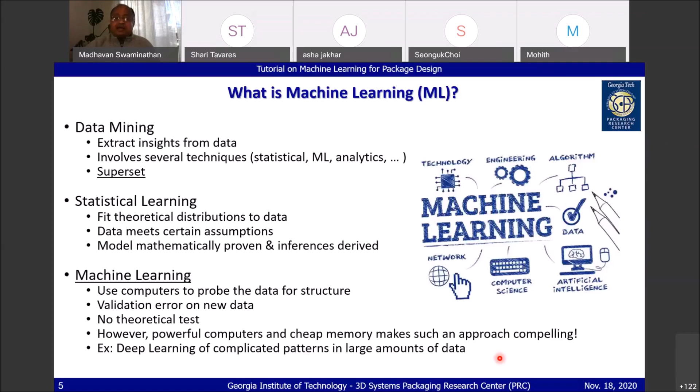So let me put this in the context of packaging, specifically design. I call this the model-based design paradigm. Typically when we do design, whether it's packaging or the general area of semiconductors, you have a design space and a set of design goals. You rely on ways to generate data in this design space so you can look at various variations of the design to make sure it meets the goals you're interested in.

Oftentimes we rely on simulators. These simulators could be SPICE, some kind of TCAD, design for manufacturing simulators, electromagnetic simulators, physics-based - it really doesn't matter. You rely on these simulators to generate data. Oftentimes when you generate this data and try to do these designs, it tends to be a very slow process. So the whole idea is to somehow speed this up.

And that is where you try to replace these slow methods for model generation through fast models. The idea here is if you can create a machine learning environment that replaces the typical way we do things, then you rely on these models that you've generated using this machine learning environment to do all of your design as well as your optimization.

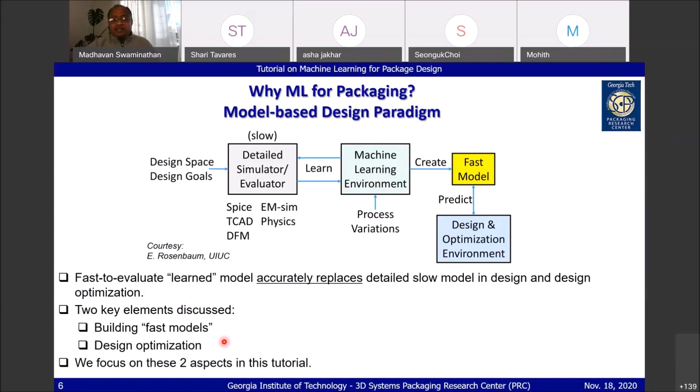So let's start with the fundamentals of machine learning. Let's say you're working with a one-dimensional problem - you have one input and one output, and they are somehow related to each other through a function f that is unknown. So what you try to do is gather data, as shown here. For every input x1 to xn, you have a certain output y1 to yn.

You group this data and call it the training data - these are the samples you have generated. You use this training data to go through this machine learning environment to come up with a learned model. This basically means creating a relationship between the input x and the output y - that's what we call the mapping. But the mapping you create is through some kind of function h, which is not the same as the function f. As a result, you will always have some level of error because these two functions do not match, but the idea is to reduce that error as much as possible.

Once you have done that, you rely on the function h such that for any arbitrary input, x1 to xn prime, you're able to get the output y1 prime to yn prime. Notice that this is new data - it's not the same as what you used for training. So if you look at machine learning, there's one part that relies on training and another part that relies on prediction.

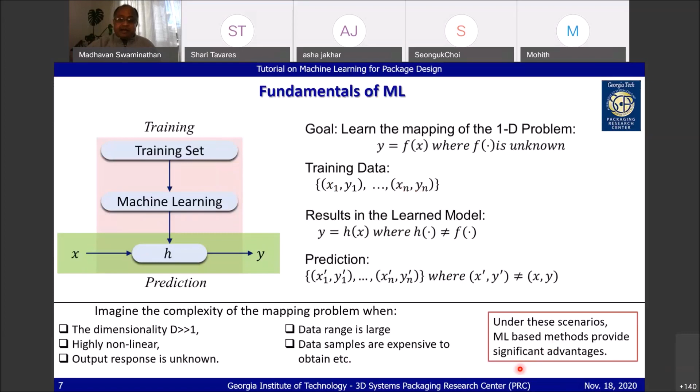So let's look at the limits and needs for packaging problems. In this tutorial, I'm going to break it up into two parts. The first part is trying to give you some flavor as to how to make use of these artificial neural networks.

I'll look at three that are important for packaging problems: a feed-forward neural network, a recurrent neural network, and a convolutional neural network. The second part is on Bayesian learning, where the benefits are optimization, fast model generation, and so on. I'll try to take you through three aspects of this learning solution. For all of these, I'll pose some problems and show how you can solve these kinds of problems that tend to be quite complicated.

Finally, very briefly, I'll touch on some future directions in the area of dimensionality reduction, extrapolation, and invertible neural networks. So let's dive deep into it.

So let us see how you would create a neural network. If you look at any neural network, the fundamental building block is a neuron, also called a perceptron. This perceptron has some inputs associated with it and an output. W represents the weights and X could be some input coming in, so you're weighting the inputs through these values W.

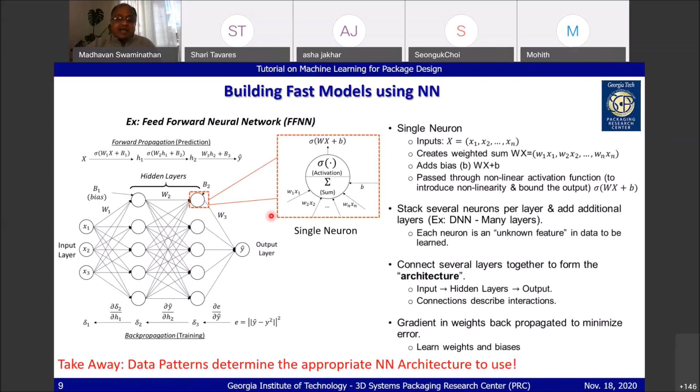Now, you have to somehow reduce the error, and that is where these back arrows come in. This is the way we control the error between what you're able to generate at the output and what the exact output needs to be. There are algorithms available that allow you to control the error by adjusting these weights. The key takeaway is ultimately the data patterns determine the neural network architecture we want to use, and in this example, the feed-forward neural network is an example of that architecture.

So how would you build a neural network? The first thing is you have to define the problem, in terms of what are the inputs and what are the outputs. The second part is domain expertise. This is extremely critical because you have to be an expert in the problem area to understand what kind of functional relationship you're trying to create, and also identify data structures.

For example, how important is the memory? I'll address this later on, along with spatial correlations and things like that. And then you go through this neural network design process.

You determine what kind of a neural network you want to make use of based on information you have about the problem you're trying to solve. Then you design your neural network architecture, which determines how many layers you need, how many neurons you need, and things like that. Then you have to generate data.

There are various methods available to generate data. We call these sampling strategies. One example is called Latin hypercube sampling. It's used quite a bit in the machine learning community. I've provided a Wikipedia link over here. It's just a way by which you can create your samples.

And then you use this to train the neural network by defining some kind of a loss function. We call this an error function. Once you've been able to minimize the error, you've created a model that you can make use of to make your predictions.

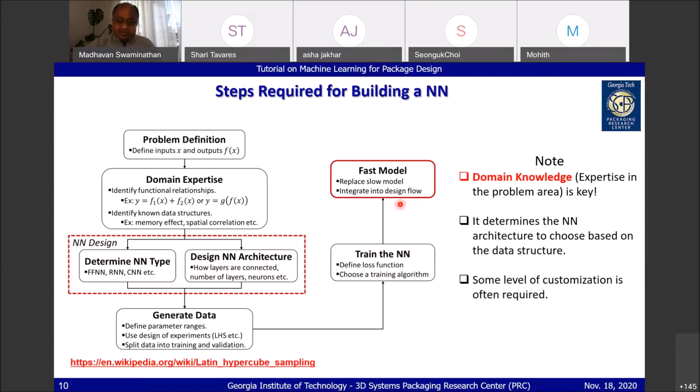So let me start with problem number one. This is an example of an antenna. Once again, the problem itself is not important. I want you to really appreciate why these neural network approaches are very useful.

Let's say I have some kind of a material here, and these blue circles represent metal particles, like nickel or cobalt, and I'm somehow coating it. That's the white region shown over here, called an oxide. And then I'm putting it in some kind of a polymer, so I'm creating a nanocomposite material.

Now, based on how you do the mixing and what material you choose, there's a set of complex equations that determines what kind of permeability and permittivity you're going to get from it. That essentially tells you how this permeability and permittivity would behave as a function of frequency.

Then I make use of this information to, let's say, design an antenna. This is an example of a planar antenna. I optimize this design so that I'm able to reach my objectives, such as gain, radiation efficiency, bandwidth, resonant frequency, and so on. So this is the process that you need to go through.

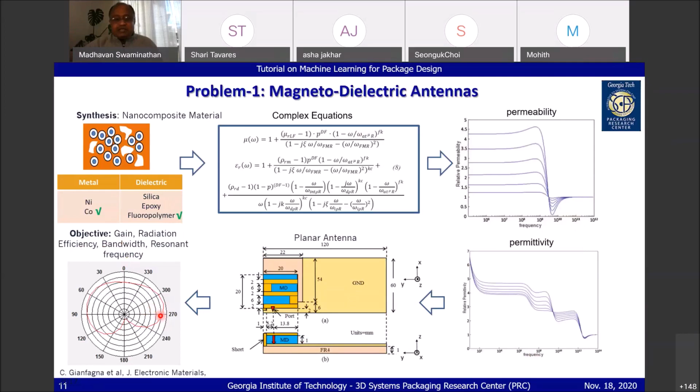Now, what we can do is basically hide all of those intermediate steps through a neural network, so that somebody who's developing these nanocomposite materials can determine what kind of properties they need to get the kinds of objectives that an antenna engineer would like. This becomes a very powerful technique because you can now go all the way from the materials aspects of the problem to an end solution. That is what is indicated over here.

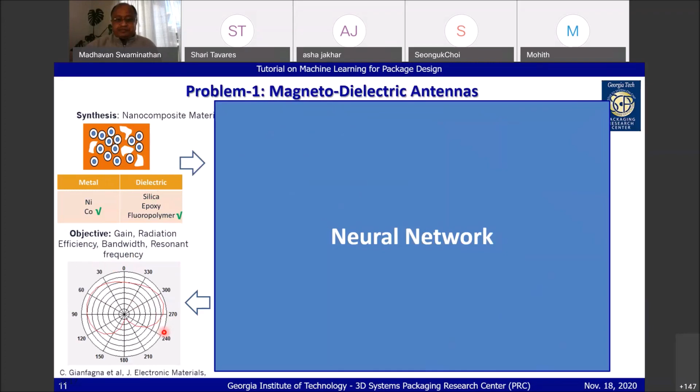So there are two parameters that have been made use of here: one is the radius of the particle, and the second is what we call the volume fraction. They become the inputs. You build this fully connected neural network, and then you create your output. If you look at the output, you have gain, radiation efficiency, bandwidth, and resonant frequency shown along the vertical axis, and what is expected is shown on the horizontal axis, indicating that you're able to make very good predictions.

Now, the benefit of creating a model like this is that you can use it to do all kinds of what-if analysis—it takes next to no time. That's why trying to create this fast model, or what we call a surrogate model, becomes very useful, because all of the information associated with that relationship is essentially buried in this kind of a model.

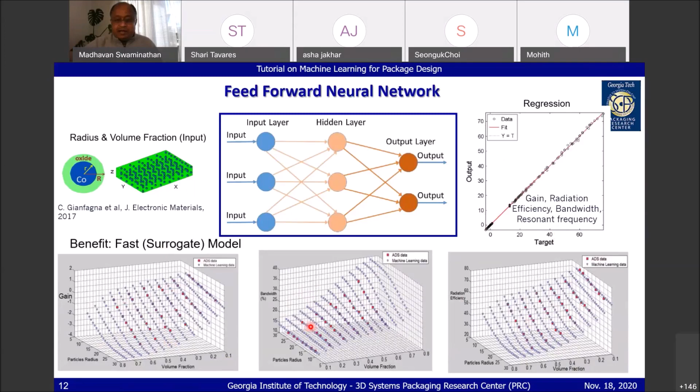So let's take another example. This is an example of a voltage controlled oscillator. Here the output voltage is a function of some frequency integrated over time, where this frequency is, let's say, another function of a control voltage. So you see the output voltage is related to one function here and a second function here.

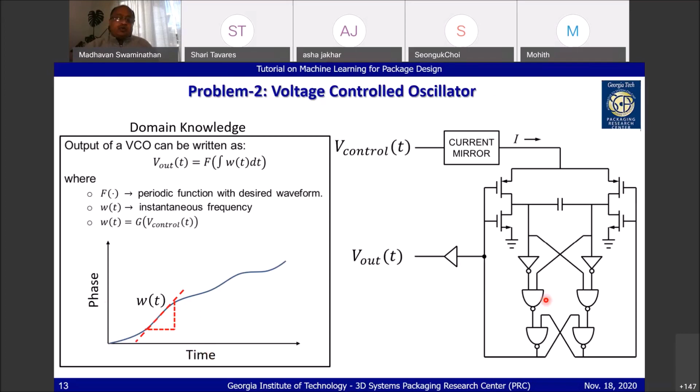Where this frequency is basically the gradient of phase versus time. So I have a circuit that I'm showing over here with these control voltages as well as the output. I can now create a neural network where this function G I can generate using this feed-forward neural network, what we call a fully connected neural network.

And the function F, I create another neural network for it. Then I have my inputs, I have my output, and then I compare it with what I would expect, to be able to do my error control. I can do the training using several algorithms that are readily available.

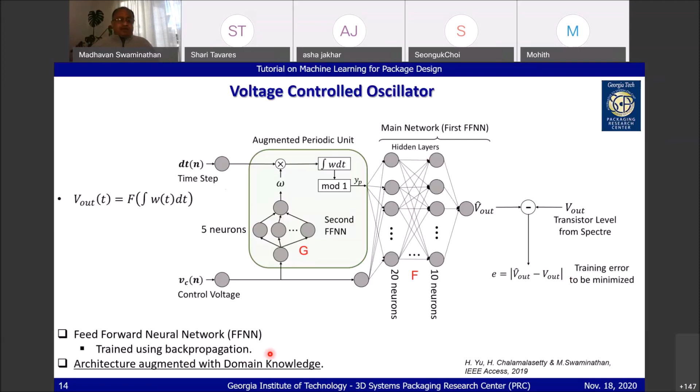This is an example where you can make use of a technique called backpropagation. Now, if you make use of this fast model, you'll see that you can generate the results shown here as a behavioral model that sort of mimics exactly what a transistor level circuit model would do.

So the blue represents the control voltage. And if you look at this waveform, the width of the pulse is continuously changing, indicating that the frequency is changing. Therefore, you can rely on this fast model to create all of these waveforms. The net result is that you save around 93% in terms of CPU time, because this becomes a fast model.

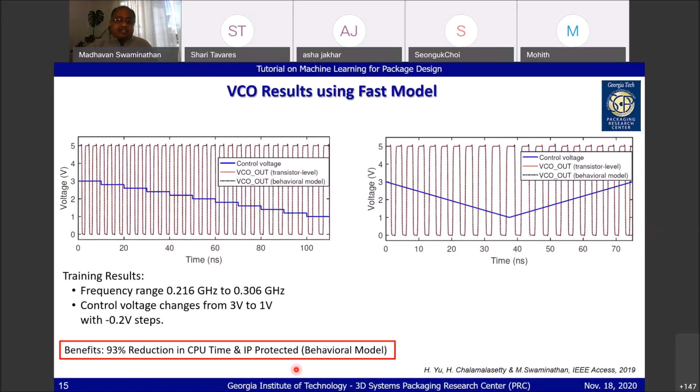Another nice advantage is that you are protecting the IP, in the sense that you are not sharing the circuit itself with others. Now, the question to ask is, what are we missing with these feed-forward neural networks?

If you're working with time series, basically time data, then there is this temporal dynamic behavior that you need to capture, which you cannot capture with these feed-forward neural networks. In general, when you have a high level of nonlinearity in circuits that have internal states or memory associated with it, it becomes very hard to capture that. Therefore, you need to somehow replace these feed-forward neural networks with another type of neural network.

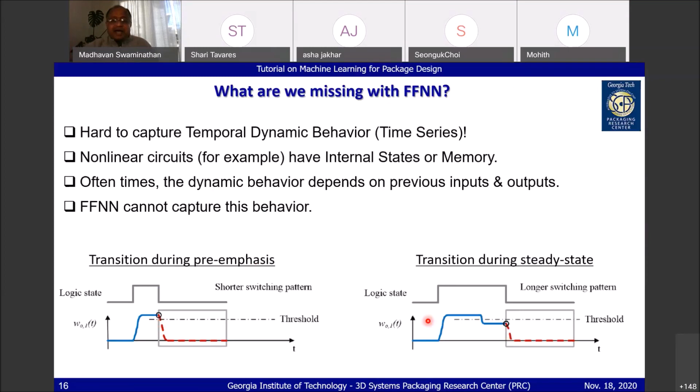So here's an example of two kinds of waveforms shown over here. The key message is that the manner in which the switching occurs depends on what happens at the previous time instance. This is where a recurrent neural network becomes very important.

What you do in a recurrent neural network is, let's say you want to create a mapping between the input and the output. You do that, but you also introduce this hidden state, where this hidden state depends on previous states shown over here. So you can create a neural network using not just the input and output, but also these hidden states that become part of your neural network.

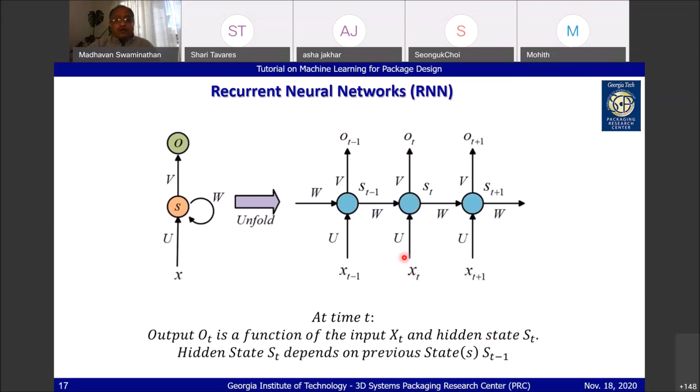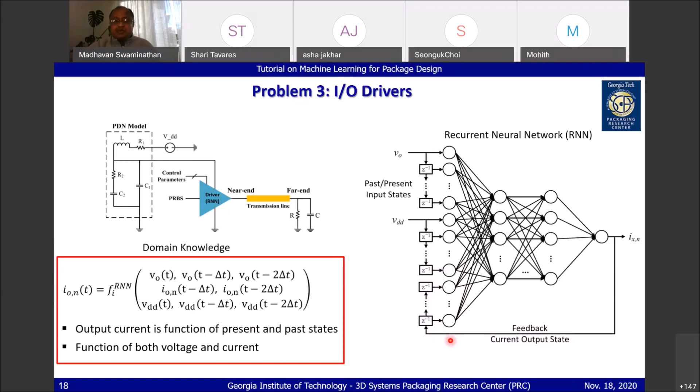So you go through a learning process, and in this example, you're learning the relationship between the current and the voltage, which is what's indicated here. So you have a bunch of voltages and currents, and you see this high level of non-linearity. You show this, you have spiking and things like that. That's what we call the dynamic behavior.

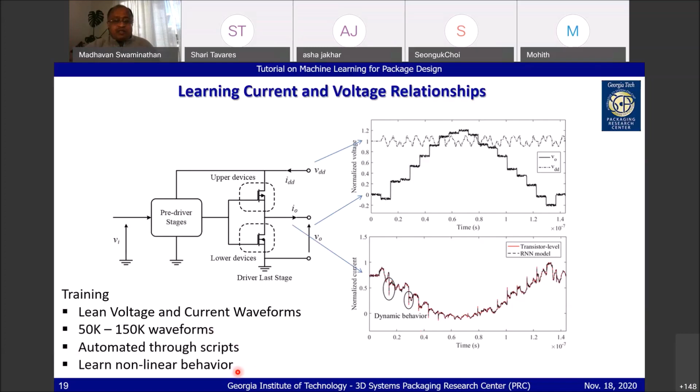So you capture all of that using a bunch of waveforms. In this example, you use anywhere between 50,000 to 150,000 waveforms. You can automate the whole process, and the whole idea is to learn this nonlinear behavior.

Once you have done that, you can now generate whatever output response you want, and you can also parameterize this whole model. As an example, you can say that this transmission line should have a line width over a certain range, and all that information is captured in this machine learned model so that you can start generating eye diagrams and things like that.

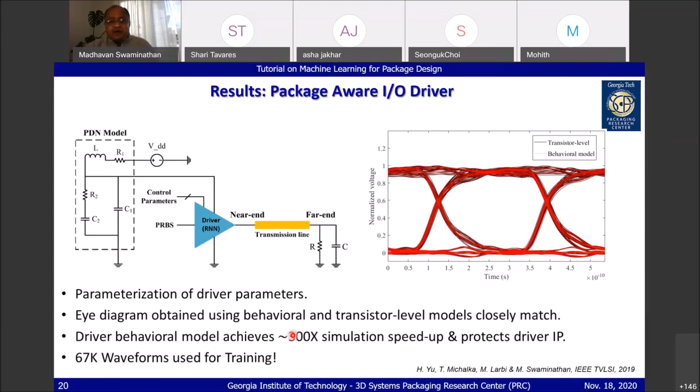In this example, we use something like 67,000 waveforms for training, but once you have trained it, generating these kinds of waveforms gives you a tremendous speedup. And once again, you protect your IP.

So next, let me get to frequency. Now, all of us understand the importance of frequency and a frequency response when we work with any kind of a package structure. What we want to do here is predict the frequency response of any kind of packaging structure. So how do you bring frequency into the neural network? One possibility is to bring frequency in as an input, and I can create a fully connected neural network over here.

The problem with this is it becomes very memory intensive. For example, if I have 500 design settings and each design setting has 2,000 frequency points, you multiply the two, and there are 1 million data points that I have to learn.

So another option is, why not include frequency at the output instead of at the input? Now when you do this, the dimensionality of the problem becomes very high at the output. The question is, how do you train that? And is this better since it is less memory intensive because you brought all the frequency points to the output?

As an example, those of you who work with scattering parameters or S parameters, if you're making use of 26 ports with 2,400 frequency points, you're looking at 1.7 million outputs. The question is, how would you go about doing this? I would like to focus on what is shown on the right-hand side today.

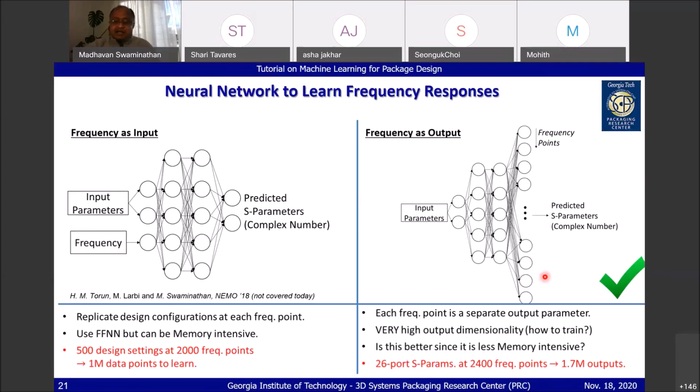That brings us to another very interesting neural network called convolutional neural networks. These convolutional neural networks are widely used in the computer vision community, and the idea is that you try to mimic human image perception. Now, what is the key takeaway with these convolutional neural networks?

If you look at these neural networks, for example in computer vision, one takeaway is that nearby pixels in images are highly correlated. So you only need to focus on part of an image at any time, and that's what is indicated here. You make use of a filter to look at only parts of the image, and then you stitch these various parts together at the output.

As you go from the right side to the left side, the connectivity of these neural networks or neurons becomes larger and larger, where you end up with a fully connected neural network over here and a very poorly connected neural network over here. That allows you benefits both from a computational standpoint as well as from a memory standpoint.

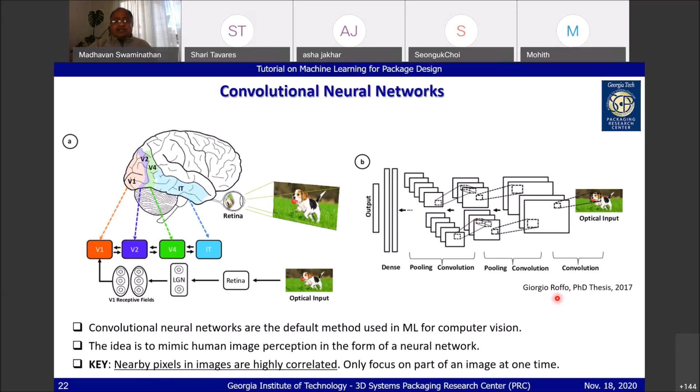So that brings us to the frequency problem. Let us say that we take these CNNs, or convolutional neural networks, and we transpose it. Instead of having a fully connected neural network at the output, why not make it fully connected at the input and loosely connected at the output?

The reason why you can do that is because if you look at a frequency response, the data points next to each other tend to be highly correlated with each other. And the word spectral comes because we are looking at a frequency response.

So if you look at this neural network, you have some input parameters, you create a fully connected neural network to be able to create what we call a latent space, defined here. All we do is create this latent space and unflatten it to get the frequency response for different kinds of design combinations.

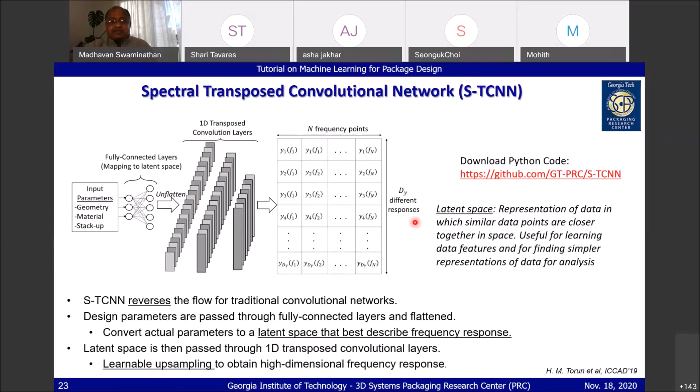And then we pass this through these convolutional layers, what we call 1D convolutional layers, that rely on the fact that frequency samples next to each other are highly correlated with each other. So we learned that, and then we are able to construct these different responses that are shown at the output.

So let's see how this works. Let's take another example. This is an example of a solenoidal inductor for integrated voltage regulators. So you're constructing an inductor here, a solenoidal inductor, with different parameters associated with it.

One of the issues with all these inductors is that they tend to resonate. And when you work with a neural network, for example a fully connected neural network, it is very hard to capture these resonances accurately. So you want to make use of something else, an example being this STCNN, or spectral transposed convolutional network. By doing that, notice that the response we are able to generate, the frequency response, is actually quite good, where all of the resonance behavior is captured very well.

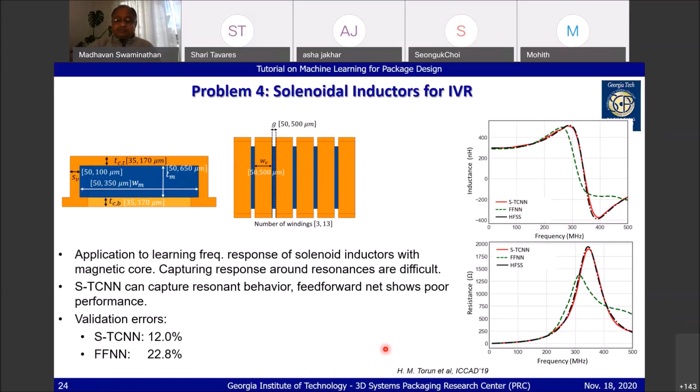Now, oftentimes when you create these neural networks with data, you want to create what we call physically consistent neural networks. This means that even though you have data, you want to make sure there are certain constraints you want to satisfy that are physics-based. An example I show here are two kinds of physics-based constraints you want to satisfy: what we call causality, and the second is passivity.

Don't worry too much about what they mean, except that there is a model that basically tells you, if you want to satisfy causality, how the real and imaginary parts of a complex number need to be related to each other, and passivity relates to the singular values of the data you're working with. So you can include these constraints into the convolutional neural network I described earlier.

This was what I showed you earlier. You can add two more layers that satisfy causality and passivity. But the key here is every time you satisfy this, you incur error in the data. One of the nice things when you create a neural network is this error control, so you can train it in such a way that not only do you satisfy these constraints, but you also minimize the error associated with satisfying them.

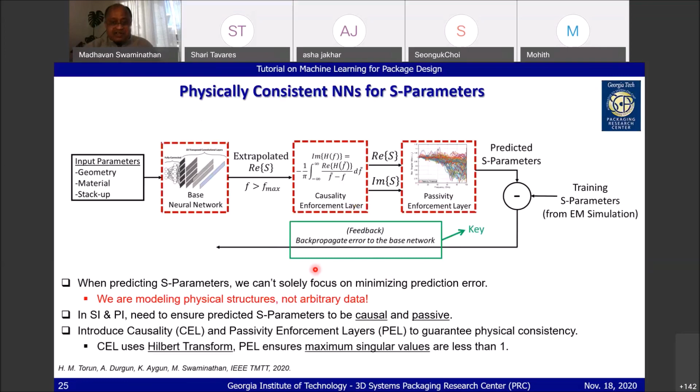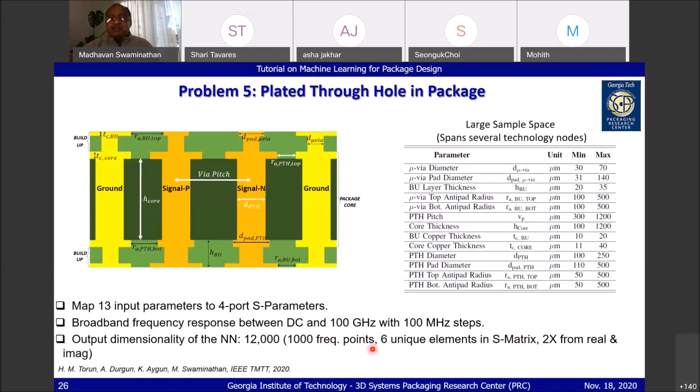Let's look at the results. You have lots of curves, and as you can see, we can generate data on the fly once you create this fast model. If you look at this spectrally transposed convolutional neural network curve and compare it with what the exact value needs to be, the error seems very, very small. However, if you take this frequency response and convert it into a time response, you see this part here - the blue curve - which basically means you're violating some physics-based constraints.

So you try to address that problem by adding these two extra layers that I showed you. If you look at the frequency response, they look very similar to what I showed you earlier with this STCNN. But the difference is that when you convert this into time information, notice that the response turns out to be very, very good, and does not violate any of the physics-based constraints or phenomena that are required. That same concept, in terms of how you make sure the data or model satisfies these physical constraints, is shown in these two graphs.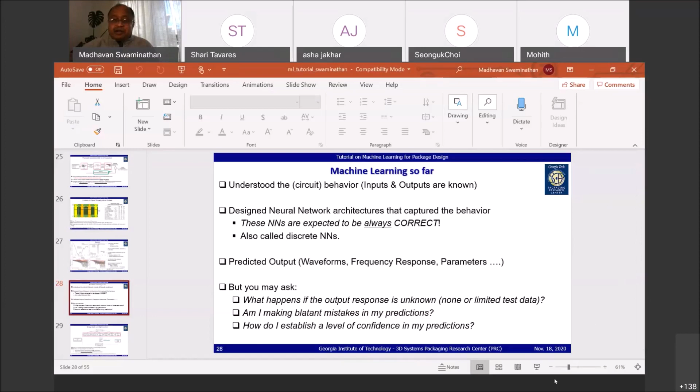Okay Shari, are you able to see my slides? Yes, they look good. So to answer some of the questions that I raised, let's go to the second part, which is on optimization. And I'm going to start with the design cycle here.

Once again, this kind of design cycle is not specific to just packaging. You can apply it on the semiconductor side and so on and so forth. Oftentimes, when you do design, you have a set of objectives and performance metrics. Based on this, you figure out some design topologies, you explore the design space, create an initial design, and then you spend time tuning these parameters, and you come up with some kind of an optimal design.

So the whole idea here is that if you look at this part, what is shown in the red box, right? There are lots of iterations that one needs to go through to make sure that the design you actually come up with indeed is the optimal design. And this is what we call human in the loop.

So the question to ask ourselves is: is there a possibility that we can completely eliminate the human in the loop by bringing in these machine learning techniques? So I'm going to focus on two elements to enable this. One is automated design optimization, and the second is what we call an uncertainty quantified model.

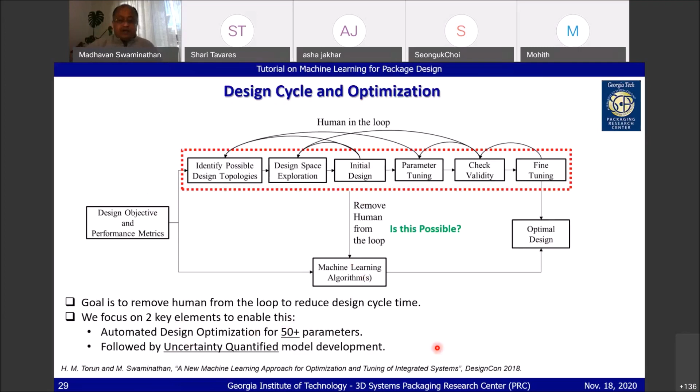So I'm going to start with a simple example, and once again I'm going to focus on optimization first. Let us say that I have an input and an output, and I've constructed a total of 6 data samples that relates the input to the output. I show you this graph and I ask you the question, where is the minimum given these data samples? And obviously the answer is, I don't know, right?

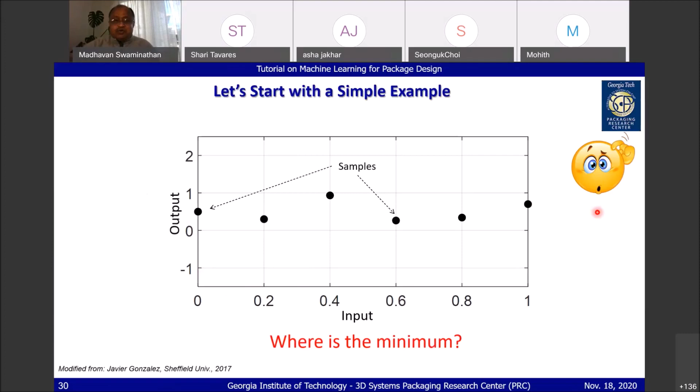So what we try to do is to fit a curve through these data points. Let's say I fit one curve through these data points, and based on this, I can figure out that the minima is right here. And that is what is shown over here. The y-axis is the number of occurrences of the minima, and the x-axis is the position where the minima actually occurs. So there is one occurrence of the minima for this curve that is shown here.

But the question you may ask is, how do you know that that is the right curve that fits these samples to each other? So I add more curves. Let's say I create 5 curves that connect these 6 samples to each other. Based on each one of these curves, I determine where the minima is. As you can see, some of them have single occurrences, some of them have double occurrences, right? The question you may ask is, how do you know that these 5 curves are sufficient?

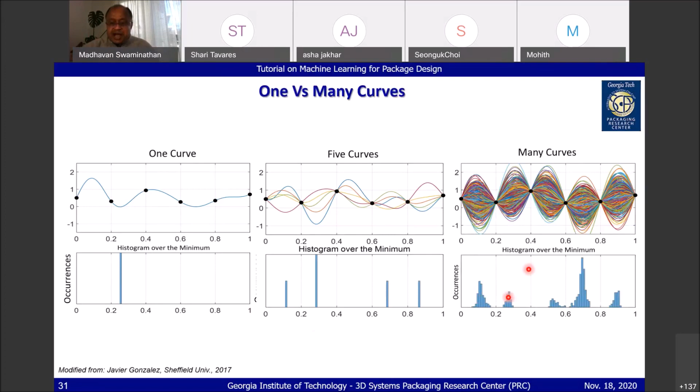So I add more curves. As you can see, as I add more and more curves, the frequency of occurrences of these minima changes, and the position of the minima changes as well. So that is what we try to make use of.

So let us say that we make use of infinite curves. I have the same 6 data samples that I've connected together, but then based on these infinite curves, I have a spread in this blue line that is shown over here, right? So if I look at this, I call this blue line my surrogate model, and I say there is a certain uncertainty around these surrogate models shown by the spread that is shown over here. And I call these confidence bounds.

Now the key thing to note over here is that I make the observation that these black samples shown over here come from a simulator that is very computationally expensive. So I want to keep these black samples to a minimum as much as possible, and instead rely on the surrogate model as a way to do my optimization.

Now if you look at the second curve at the bottom, the y-axis is your occurrences and the x-axis represents the position. So this is nothing but your probability distribution function. If you look at this, it now becomes a continuous curve, so it's no longer a histogram. Based on the number of occurrences that I have, I can determine where the minima is going to be, and that becomes my next sampling point.

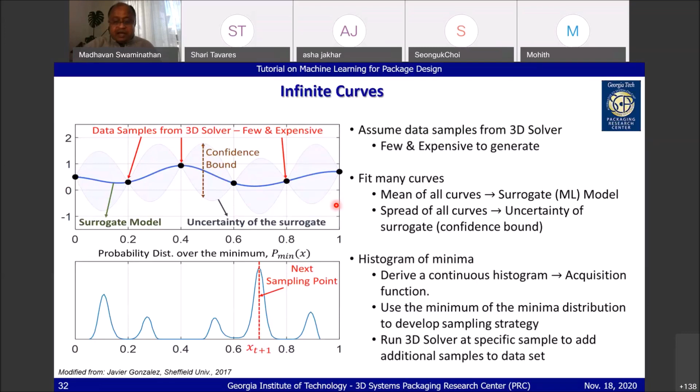So the next sampling point means that I'm going to make use of this expensive solver to add another sampling point so that I learn more about this function that connects all these samples to each other. And that is what is indicated over here.

So you have a surrogate model, and in general the surrogate model we make use of is called a Gaussian process. It's a very well-known process that has a certain mean and a covariance associated with it. This K over here, we call this a kernel, and the kernel is nothing but a covariance function. I'll explain to you shortly what this kernel actually represents.

If you look at this kernel, you'll come across some parameters you need to tune, and we call these the hyperparameters. Hyperparameters are adjustable parameters that must be tuned to obtain a model with optimal performance. If you look at this Gaussian process and try to plot it, this is what it's going to look like: there's a line that corresponds to the mean, and then there's a spread that gives you your confidence bounds and so on.

The second function that I showed you, which is the histogram that becomes a continuous curve, is what we call an acquisition function. We make use of this acquisition function to determine where the next sampling point needs to be. Once I've determined what the next sampling point is, I can make use of that to run my 3D solver to learn more about this system or function.

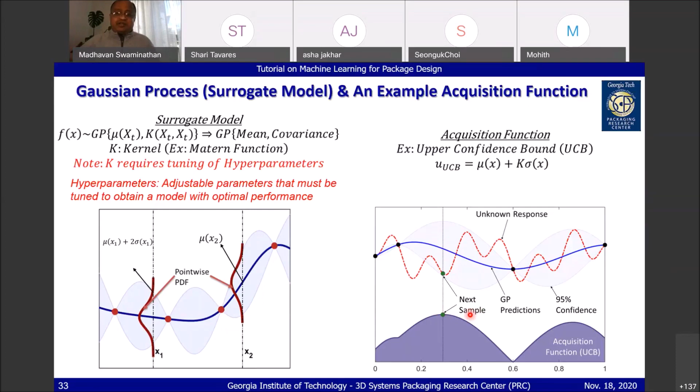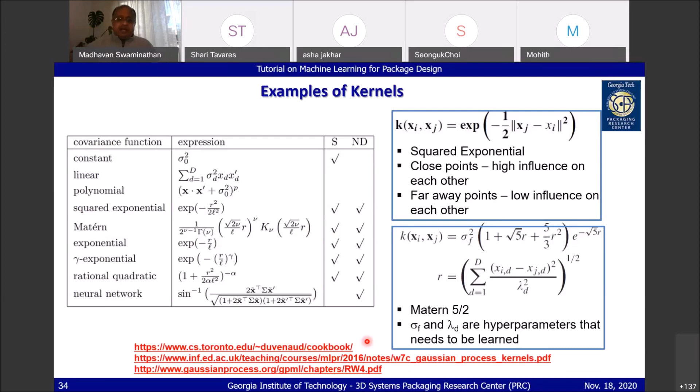So that brings us to this Bayesian active learning and optimization. So how does it work?

Let's say you're looking at a 1D function, so you have one input and one output, shown as a function of the input. Based on this, I do a function evaluation, and then I rely on this model, essentially my acquisition function, to determine what the next sample needs to be. This means I'm using the 3D solver very few times and relying on my acquisition function to figure out where the next sample needs to be.

We call this learning process active learning because I haven't pre-constructed a model. As I add additional samples, I'm continuously learning from it. This, I believe, is a must-have for packaging. It takes this original problem, which is very hard, where you're generating data from a 3D EM simulator, and transforms it into a series of much easier problems to solve using this acquisition function.

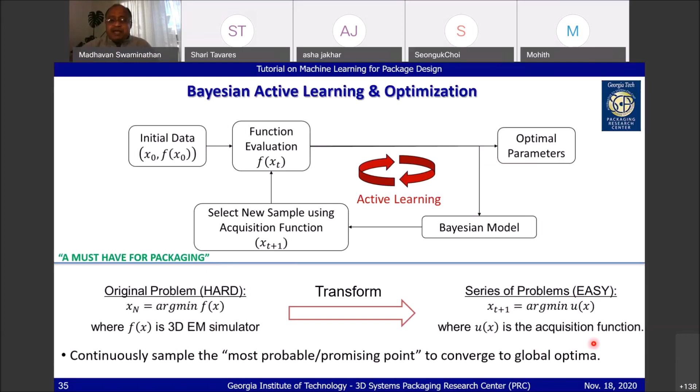So a few questions to ask yourself: how do you decide the next sampling point? You're relying on this acquisition function, which itself has several peaks and valleys. So how do you know you're actually choosing the next sampling point based on the minima associated with that acquisition function? Therefore, you have to do optimization.

The question to ask yourself is, if you're trying to optimize the acquisition function, and the acquisition function itself is highly non-convex, meaning it has lots of peaks and valleys, then optimizing that acquisition function can be very time consuming.

The second question is, how do you know which is the right acquisition function to choose? You just don't know, because it is problem dependent. So you need some kind of generalization capability.

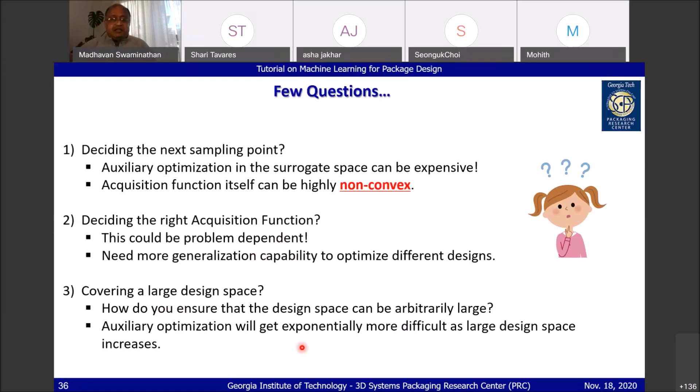The third is, if I'm trying to cover a large design space, how do you actually make that happen? Because how do you address a large design space while also reaching the global optimum at the same time? So let me put this in the context of another example or problem.

This is in the area of clock skew minimization for 3D ICs. Once again, the problem itself isn't important, because we're going to pose it as a black box problem. In this example, I have a bunch of chips sitting on top of each other, connected through TSVs. The center chip has a clock distribution network, and the top and bottom chips have logic circuits. As these circuits switch, they create heat that generates a temperature gradient along the center chip. That temperature gradient creates clock skew.

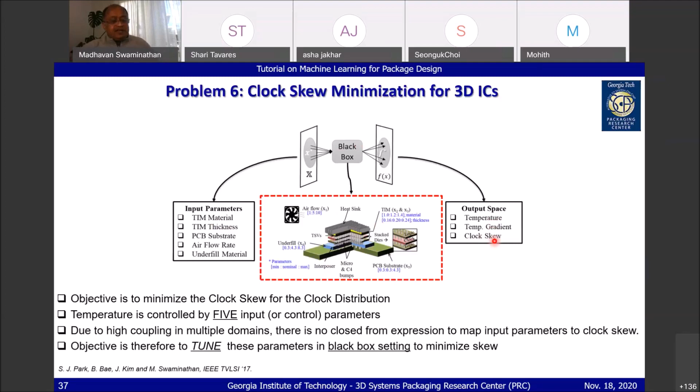Your goal is to minimize the clock skew by minimizing the temperature gradient, using a set of input parameters. So this problem is represented as a black box, where the input parameters you want to tune are shown here, and the output is the minimization of the clock skew. This is an example with 5 control parameters.

Let me take you through a technique called two-stage Bayesian optimization, and I'll show you how this works. You break up the problem into two parts. The first is fast exploration, meaning you're trying to learn more about the system, so you look at regions with large variance or uncertainty in the data and create sampling strategies around that. Then you do pure exploitation, meaning you try to converge to the actual result, so you look at closely spaced points.

Now, the method itself is broken up into three parts, shown here. I'm just going to focus on one of the issues associated with learning acquisition functions, which was one of the questions I raised earlier.

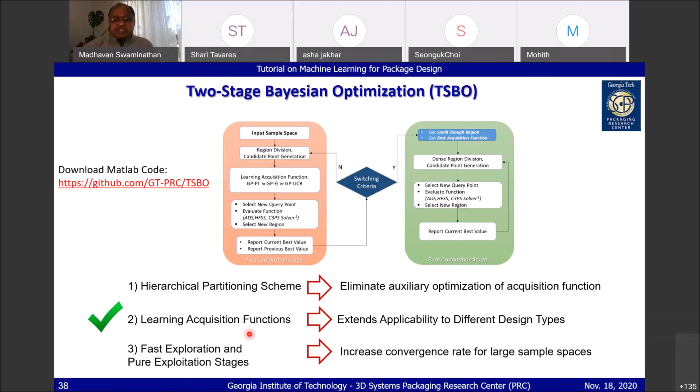So let me address learning acquisition functions. What you can do is, rather than working with a single acquisition function, work with a library of acquisition functions. The examples shown here are the upper confidence bound, which I showed earlier, and another acquisition function, expected improvement, or EI. So you have a library of acquisition functions.

As you go through the optimization process, you learn which acquisition function is appropriate depending on what stage of the solution you're looking at, and that's what's indicated here. So not only do you learn the behavior of the response or function, but you also learn the acquisition functions. There is a way by which this can be done.

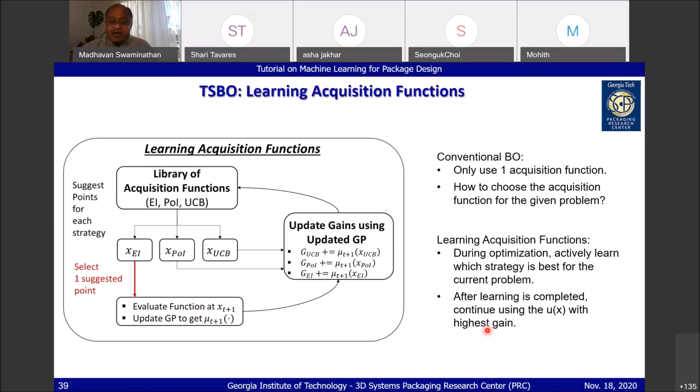So let us see how this works. If you look at this response surface here, it's a 2-dimensional problem. I have two inputs, x1 and x2, and let's say 1 output.

This triangle represents a sample that I've created using my EM solver, and this represents iteration number 1. That's my starting point, so I have 1 data point. Now I use a sampling strategy to create these circles, what we call candidate points.

Making use of these candidate points, I use the acquisition function to figure out where exactly the next sample needs to be. In this example, the next sample should be at x1 equal to -1 and x2 equal to -1. So I take this and run my 3D solver to generate another data sample, which would be a second triangle.

Notice that in this response surface, the global optima is right here, shown as the diamond. As I go through this process, let's say I go to iteration number 15, you see you're going to have a lot more triangles. That means I have run this 3D solver to learn more about the system. This is the exploration stage.

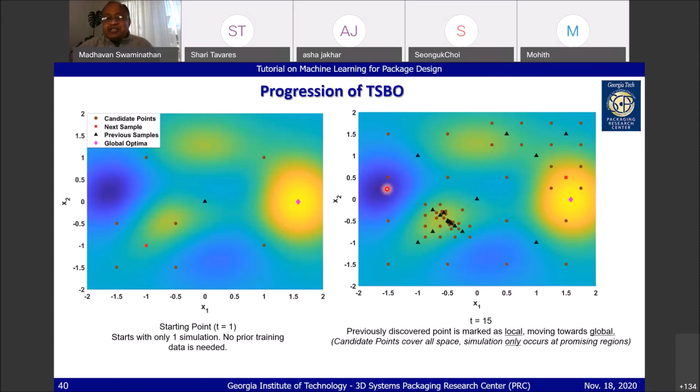Based on this, I also create these circles, which represent my candidate points based on my sampling strategy at iteration number 15. Based on this, I determine that the next sampling point needs to be over here, corresponding to x1 equal to 1.5 and x2 equal to 0.5. I run my 3D solver again.

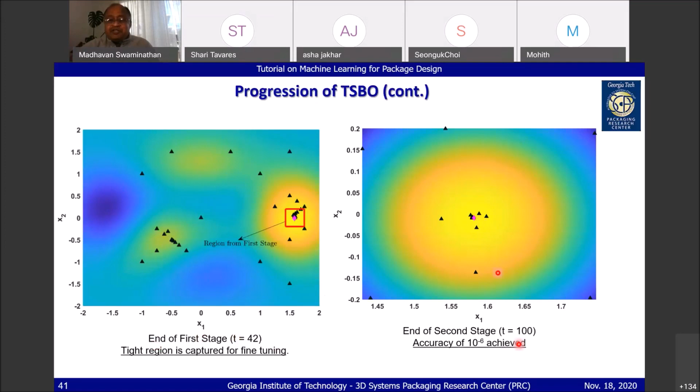Let us see how these results look like. I take the same example, and the blue curve here represents the convergence of this method that I just described. The x-axis represents the number of simulations you're making use of. The y-axis represents your clock skew.

The first part, the steep part over here, represents your exploration. Very quickly, you try to come to the region that has the global optimum. Then after that, you try to converge to the exact value. This part here depends on the kind of accuracy that you're looking for.

Now, we've also compared this with two other methods. One is what we call a nonlinear solver, shown as a green curve. And IMGPO is another machine learning based algorithm that has been used in the neuroengineering community. If you look at the convergence for both of these techniques, it's not as good as what I just described.

The takeaway is that oftentimes people say you can make use of a machine learning technique that's available, a toolbox, and blindly apply it to your problem. The answer is no, because if you do that, you'll only get so much benefit. You need to understand the data structures—that's where domain expertise comes in. Once you understand the data structures and the samples you have, you can come up with a much better solution compared to what's out there.

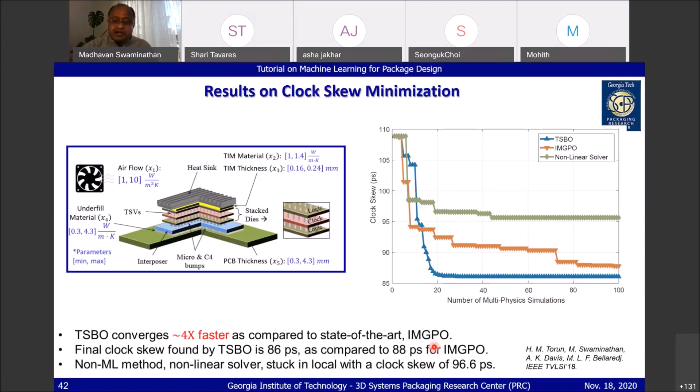So let us take this method that I just described and say what happens if I want to increase the dimensionality from 5 to something much higher. You will find that very quickly you start meeting two fundamental problems. The first one is what we call the statistical problem: how do you construct a high dimensional predictive model with scarce data, especially when parameters interact with each other?

This is where the kernel comes in, what we call the surrogate model. The surrogate model is only as good as the kind of model, or the kind of kernel, you're making use of to construct it. So if that model is not good to begin with, you'll always hit a wall in terms of how much additional information you can get from that surrogate model.

The second is algorithmic: how do you choose the next sampling point? Because if you do this auxiliary optimization that I mentioned earlier, it's not very practical. As you increase the number of parameters, say from 5 to 30, you have a very complex surface for the acquisition function, and doing optimization on that surface can take a lot of time as well.

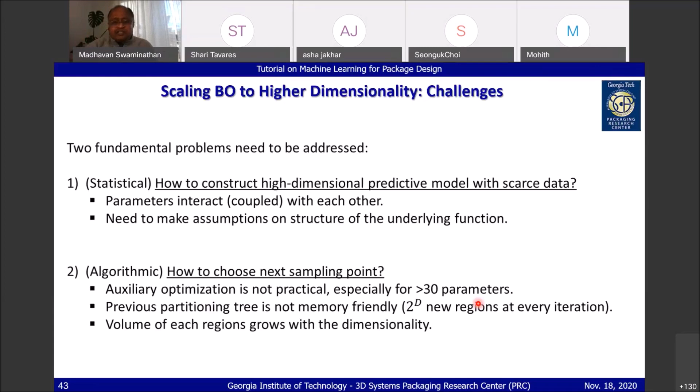Let me try to address both of these issues briefly. If you want to scale this optimization technique to higher dimensionality, you can change the kernel. You construct what we call an additive Gaussian process. The idea is to create different kernels that you can add to each other, and depending on the kernel you use, you capture the first order interactions, the second order interactions, or even the dth order interaction. This additive Gaussian process is a superset of the conventional Gaussian process I mentioned earlier.

The second issue is, how do you go around this whole auxiliary optimization problem on the acquisition function? The answer is you create some kind of tree structure where you rely on candidate points, and based on these candidate points, you develop a method that allows you to figure out which one of these candidate points you can use as your next sampling point. This method is available for you to download from the link shown here. So let us see how this works.

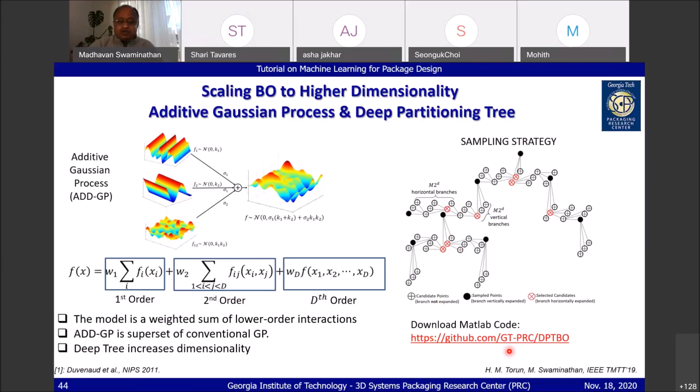I'm going to take the example of an RF wireless power transfer system. In this example, you have a very complex circuit, where some of the circuit elements are in the form of a layout and others are in the form of transistors. Since it's an RF wireless power transfer system, the input is RF power and the output is DC power. So your goal is to maximize the RF to DC harvesting efficiency, while at the same time minimizing the RX coil area, so you can build a miniaturized system.

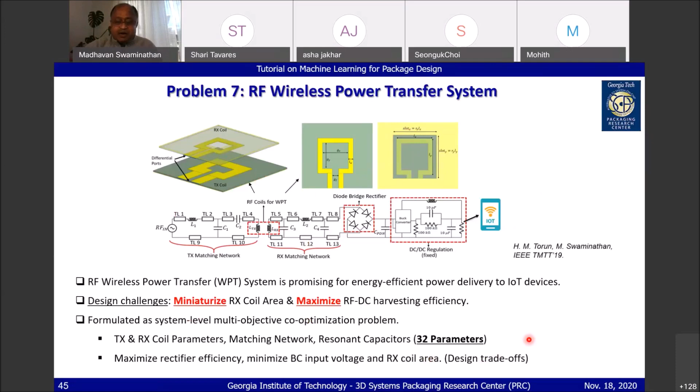This example has a total of 32 parameters. Remember, from 5, we have increased it to 32. Let us see how this works. The results are shown here. With this method, the additive Gaussian process along with the deep partitioning tree, the system efficiency you're able to reach is around 60% or so.

With a coil area of around 11 square millimeters. If you compare it with some of the evolutionary algorithms out there, for example particle swarm, you see the efficiency is lower, but the coil area is smaller as well. There is a way by which you can control or weight which of these parameters is more important to you. In this example, it was weighted so that the system efficiency had a higher weight compared to the RX coil area.

Now what you see in the center is a run-of-the-mill, readily available additive Gaussian process code. If you blindly make use of that, you see that even though the system efficiency comes close to what was shown, the RX coil area becomes very large. So the takeaway here is that you gain quite a bit if you're able to understand the problem and make changes to the neural network based on that information. If you look at these two boards, the first one was hand-tuned, took us around 6 months. The second one is this machine learning-based solution. You get an advantage not only in performance, but in size as well.

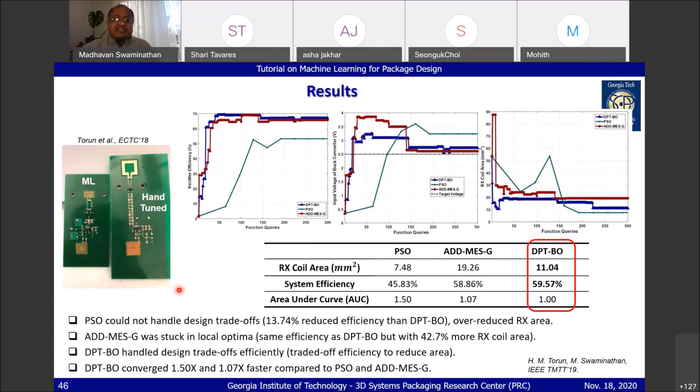So with that, let me move on to the last part of this presentation before I get into future directions. And this is in the area of creating uncertainty quantified models.

Very important. When we looked at optimization, our goal was just to reach the optimum, right? But why not generate a model at the same time while we are reaching the optimum? That's what we call model building. So instead of just sampling to be able to reach the optimum, why not sample wherever the variances are very large, so that you can also construct an accurate model at the same time? That's the concept shown over here.

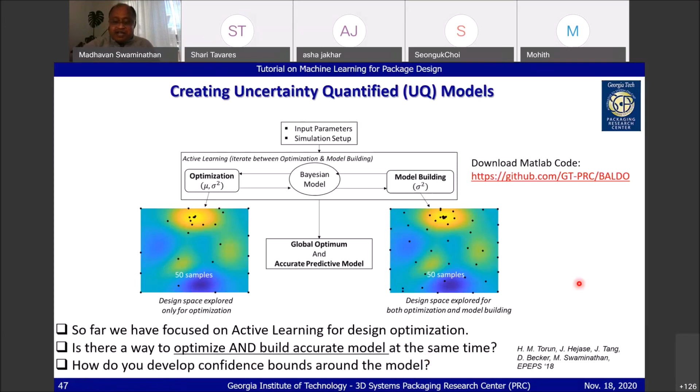Once again, this is available for free download from this website. So the question is, what is the importance of this uncertainty quantification and what exactly does it mean?

Let me not focus too much on these equations over here. Let's see what we've done so far. When you do training for optimization, remember the variances you're generating basically quantify the uncertainty around the data. So if you have lots of samples, the variance gets reduced, and therefore you reduce the uncertainty around your predictions.

Now another issue still remains: the hyperparameter. How do you know that if you set the value for that hyperparameter at a certain value X, the same value X can be used when you're trying to work with another set of data? So this hyperparameter value constantly needs to be tuned so that you're able to fit the model. That becomes an uncertainty.

There's a way by which you can include that uncertainty in your model generation as well, and that's what is indicated over here. So using this second approach, not only do you account for the data uncertainty, or the uncertainty associated with the lack of data, but you also include the uncertainty associated with the quality of the model as you tune these hyperparameters.

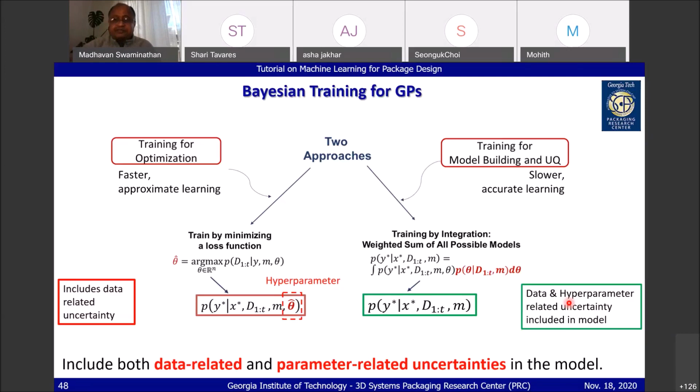So let me show you a last example. This is in the area of high-speed channel signaling. I have two chips here sitting on a package, and they're communicating with each other through this board. The idea is to be able to do differential signaling at a very, very fast data rate from the transmit side to the receive side.

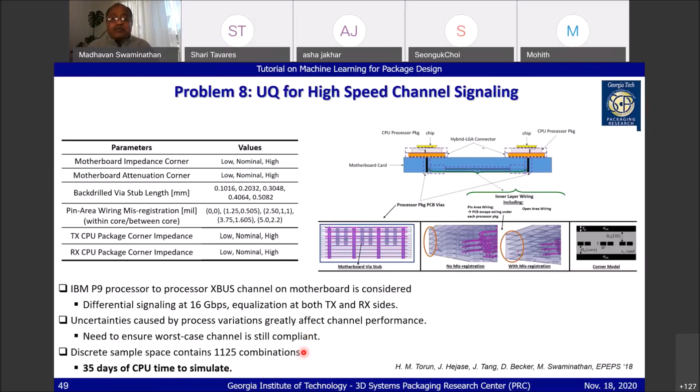There are several parameters you need to tune to make sure this communication is possible. If you look at the combination of these parameters in the discrete sample space, it's around 1125 combinations. So if you try to do it one at a time, as one would expect, it takes a huge amount of time to simulate. The goal here is not only to include this kind of design space, but also to look at process variations, and the corner points where things could potentially fail.

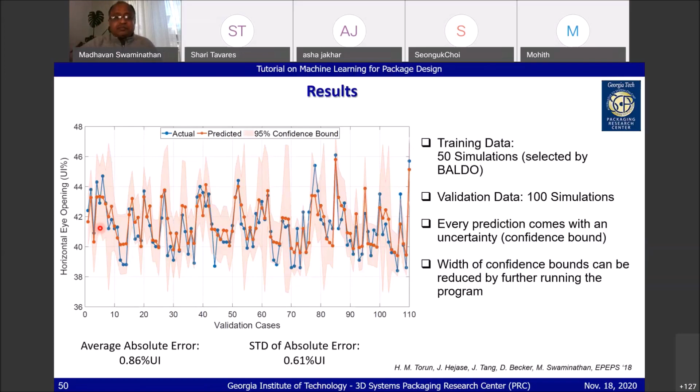So with that, given the 5 minutes that I have, I'm just going to conclude by taking you through 3 topics that I believe are very, very important for this community.

The first is in the area of scaling. So far, everything that I showed you takes you up to around 50 dimensions or so. Let's say you have 50 input parameters, you have this very complex response surface. You either want to generate a model or do optimization around it. It's doable.

Now, one of the challenges we face is every time we create a surrogate model, as the dimensionality increases, you no longer get any more useful information from it. It's like a bucket. As you fill the bucket with water, once it's full, the bucket is not going to be a whole lot useful anymore. In fact, sometimes it can actually work against you. The same concept works over here.

So the question is, how do you start increasing the dimensionality? This is where domain expertise comes in. Most of these machine learned models that I showed you, there is a way by which you can list the sensitivity of these parameters almost for free.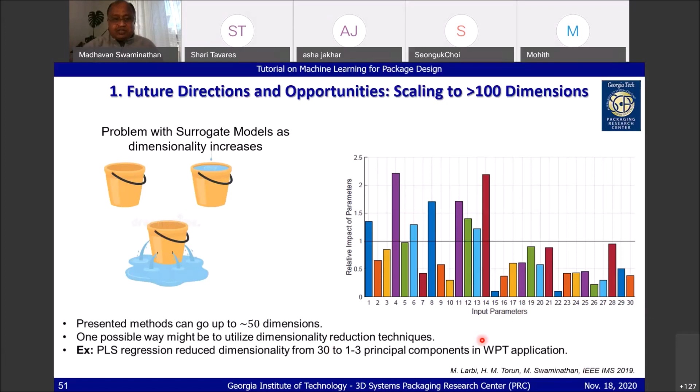Let's say you want to go outside of the space, for example beyond 12 gigahertz. The only way to make predictions is to relearn what happens in that region. However, there is a way by which you can take these neural networks and create an architecture so that you can generalize the solution, whereby once trained over a certain space, you can use the same neural network to extrapolate outside of it. That's why we call this extrapolation.

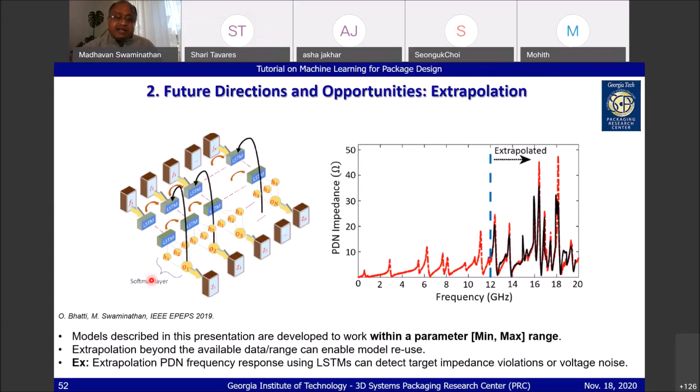The third is what we call invertible neural networks. It's not an easy neural network to generate, but the benefits from it can be huge. So far, all of the neural networks I described work in the forward direction: given an input, you map it to the output, and by making use of the neural network, you make your predictions. Let's say you want to do the reverse.

So given an output, I want to predict what the input parameters need to be. Think of a scenario with a very complex problem, for example the antenna problem I described as problem number 1, where you're interested in the gain of the antenna, and based on that you want to figure out the size of the metal particles. The inverse process requires thinking a little differently about how you create these neural networks. We call these invertible neural networks.

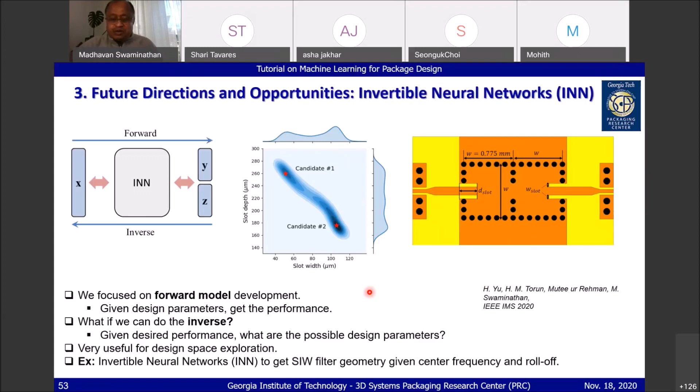Once again, what is shown over here is just one way to do it, not the only way. So with that, let me summarize by saying that I covered a little bit of work in the area of neural network development and design optimization. This uncertainty quantified models, I believe, is very important to all of us, because without including this, a lot of the predictions that you make may or may not be accurate. And there is some way by which you can quantify that. And in terms of future directions and opportunities, I listed three examples over here.